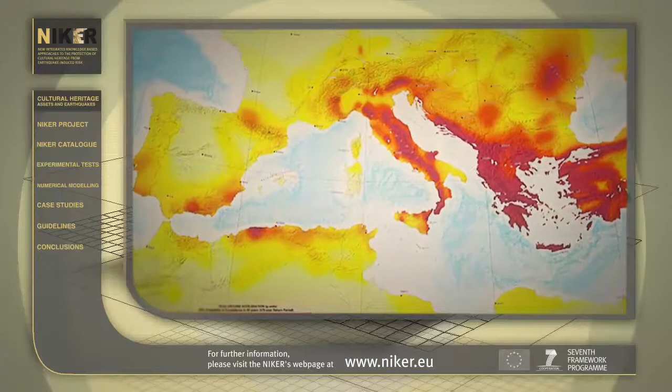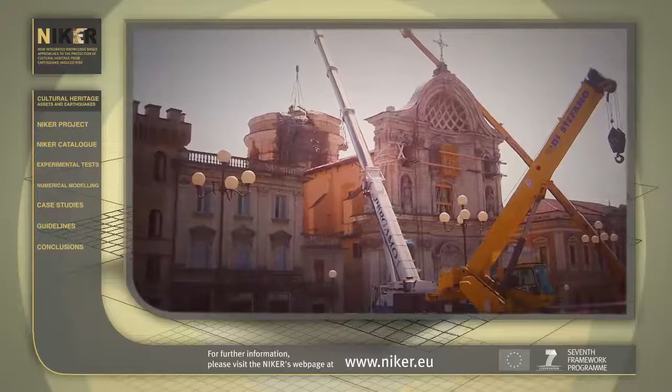For example, about 20% of Europeans live in areas with a moderate to high seismic hazard. In addition to high loss of human lives, earthquakes are also responsible for significant loss in cultural heritage assets, the most vulnerable and valuable constructions. Recent earthquakes have demonstrated a strict correlation among safety of citizens, loss of cultural heritage value, and increased danger caused by incorrect interventions on buildings.

Earthquakes are unpredictable and inevitable, but the loss caused can be minimized. Together with a suitable characterization of the seismic hazard, the main tool to mitigate casualties and protect cultural heritage assets is the development of materials and technologies aimed at reducing the structural vulnerability of the constructions to earthquakes.

Potential damages on cultural heritage assets are currently too high, mostly due to their intrinsic vulnerability and to the fact that most of the materials and technologies applied to date are too intrusive, cost inefficient, and often unreliable or non-effective.

NIKER is a research project funded by the European Commission, aimed at the protection of cultural heritage from earthquake-induced risk. The NIKER project encompasses the active participation of 18 partners, representatives of universities, research centers, public organizations, and private companies from 12 countries of Europe and the Mediterranean basin.

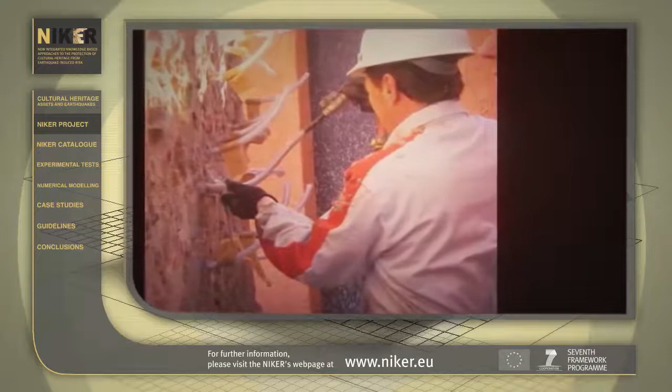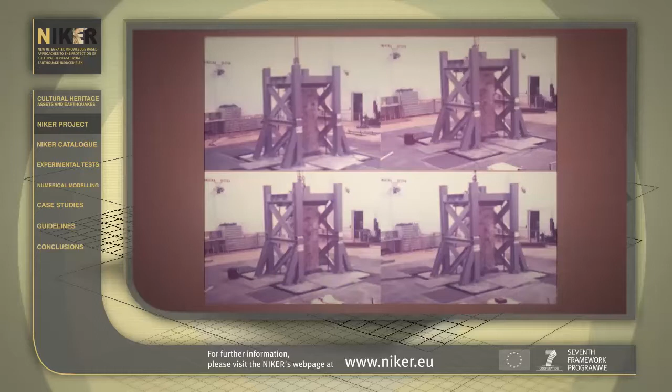The project tackles the problem of earthquake impact on cultural heritage assets, starting from consideration that efficient protection can only be achieved on the basis of the minimum intervention approach. This requires that the potentials of existing materials and components are exploited as much as possible, and that candidate interventions are validated and optimized under real-life conditions.

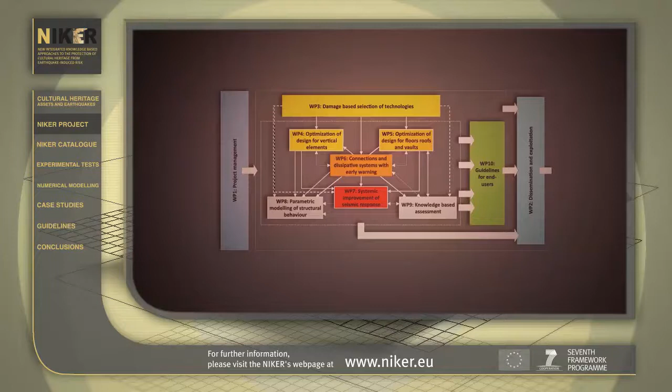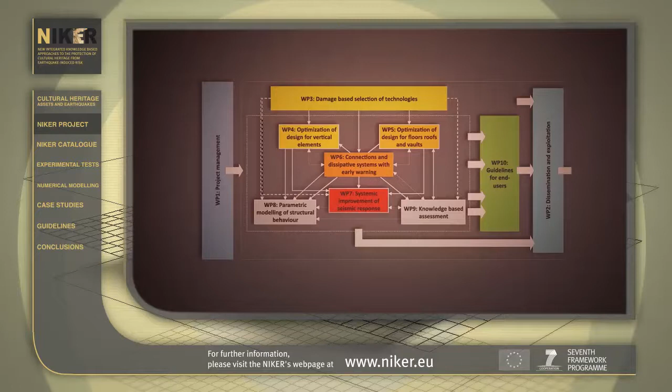The project is organized into 10 interactive work packages. Its main objective is the development and validation of innovative materials and technologies for systemic improvement of seismic behavior of cultural heritage assets. To reach this goal, the project is structured into 3 main steps.

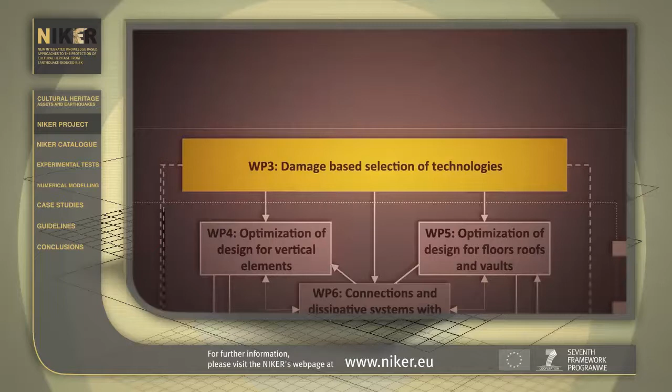Creation of a database with new relational structure with the task of orienting and assisting the development of materials and techniques for intervention. Experimental testing, numerical simulation, parametric modeling, and derivation of design methods for vertical and horizontal structural elements and connections, and for the overall seismic behavior of buildings.

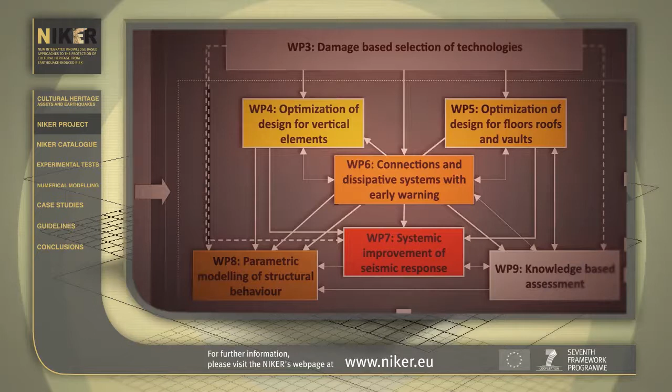Development of knowledge-based assessment procedures, validation of the entire methodology on real case studies, and development of guidelines for end users.

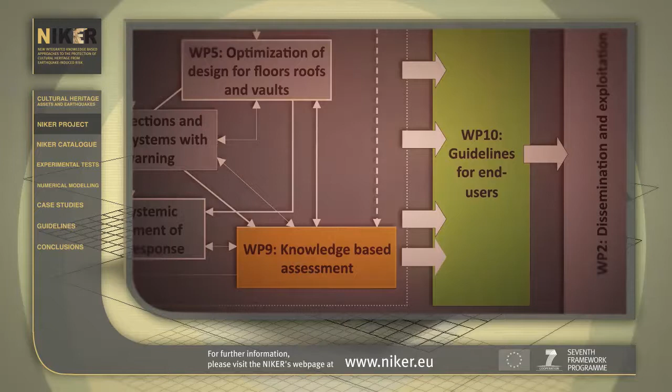The first step of the project deals with the studying of available classifications and databases on earthquake-induced failure mechanisms, construction types and materials, interventions and assessment techniques, in order to cross-correlate the information already available in literature.

Cultural heritage construction typologies and the related structural elements are listed and associated with the most significant failure mechanisms for each structural element. The main outcome of the catalogue is a matrix that connects the available intervention techniques with the elements on which they are applicable and the related failure mechanisms that can be hindered or reduced.

This relational structure also provides the performance indicators of the strengthening techniques when these are available in literature or from the tests carried out within the project.

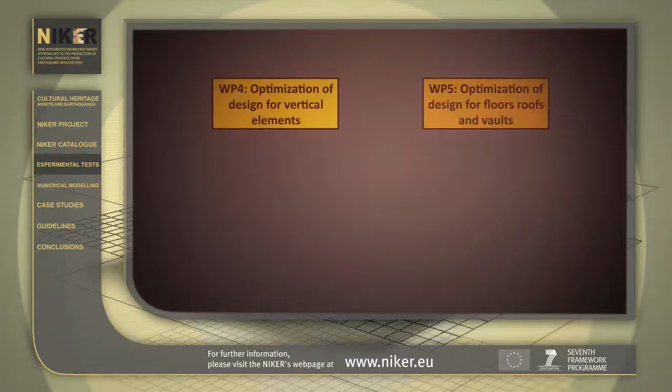The overall seismic response of historic buildings is determined by the behavior of the single structural vertical and horizontal elements, as well as by their mutual connections. The experimental activities within the NIKER project include testing of vertical elements, testing of horizontal diaphragms, testing of structural connections, and shaking table testing of substructures and building models.

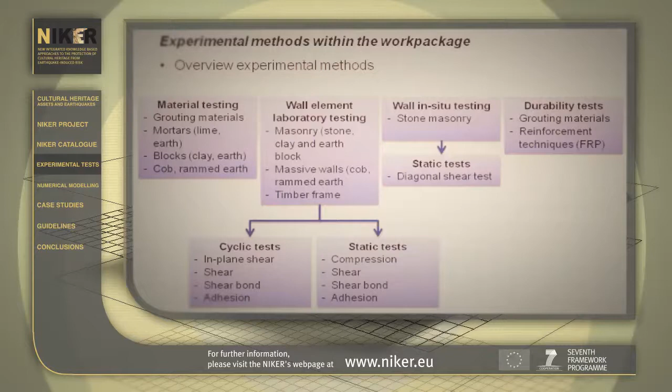The experimental tests on vertical elements were carried out on stone, brick, earthen and timber-framed masonry walls. Tests were also carried out on real walls on site.

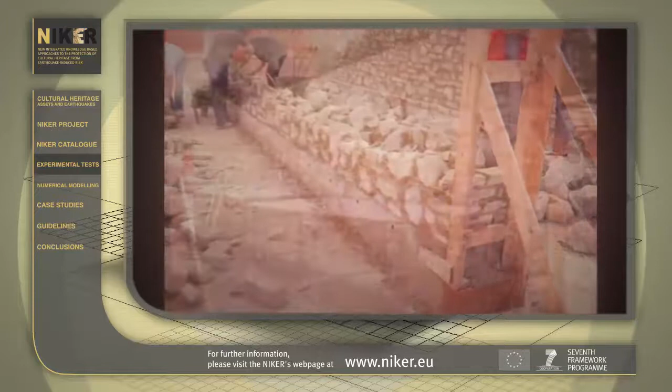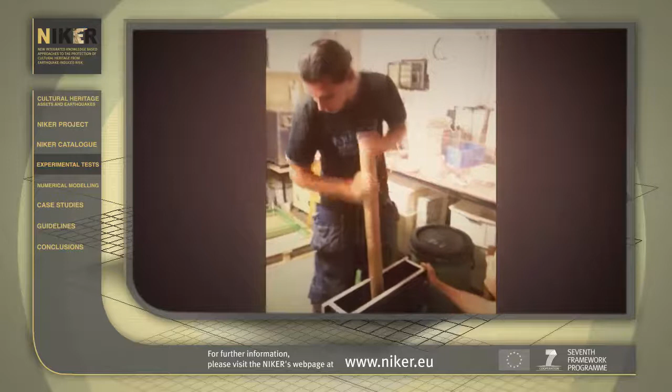The construction techniques for stone masonry consisted essentially in regular and irregular three-leaf limestone masonry. Adobe walls were constructed as one-leaf masonry with earthen mortar. Rammed earth specimens were prepared by hand with formwork. Cob specimens consisted of a mixture of raw earth and straw. The timber-framed panels consisted of timber and clay brick masonry.

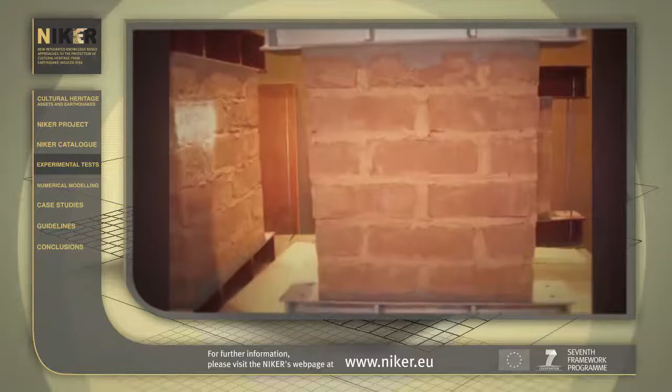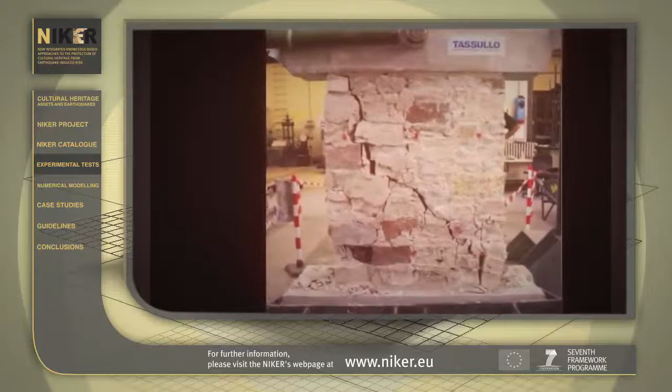Different types of strengthening were considered, ranging from traditional to innovative techniques and materials. The static and cyclic tests carried out encompassed uniaxial compression tests, diagonal compression tests, and shear compression tests, in order to get a comprehensive characterization of basic mechanical properties and of seismic performance of the masonry walls with and without retrofitting.

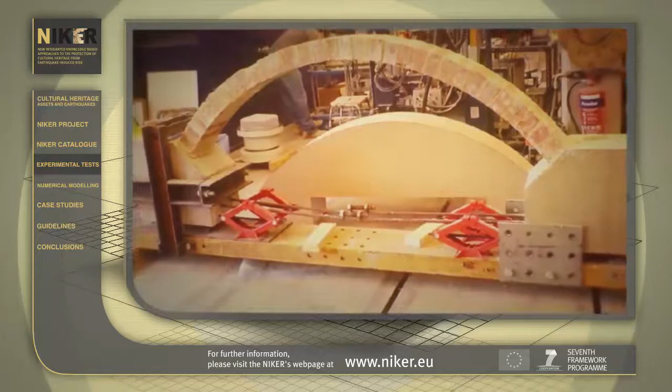The experimental tests on horizontal diaphragms were mainly aimed at characterizing the in-plane stiffness of wooden floors, the formation of a four-hinge collapse mechanism in brick masonry vaults, and the cyclic behavior of roof wooden frames.

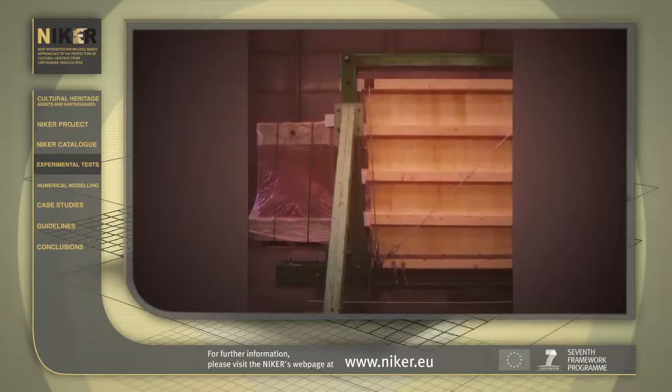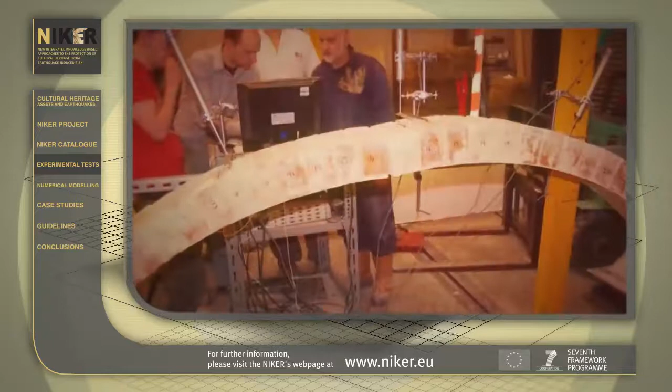The in-plane monotonic and cyclic tests on wooden floors were carried out on both reconstructed wooden floor specimens and on-site bare wood or trodden earth floor specimens. Various strengthening techniques were applied. The brick masonry arches were tested under monotonic and fatigue loading, with intrados and extrados SRP strengthening.

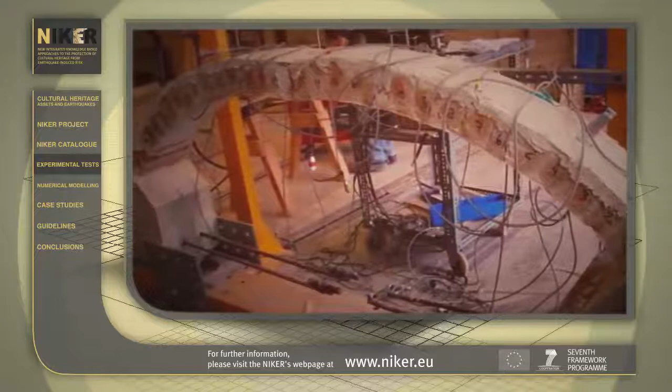Cyclic tests were carried out on brick masonry vaults before and after strengthening by various types of fiber-based composite materials. A series of tests were carried out on wooden trusses rescued from existing buildings, also in relation with the deterioration of the connections, and the physical and mechanical characterization of wooden materials in timber elements.

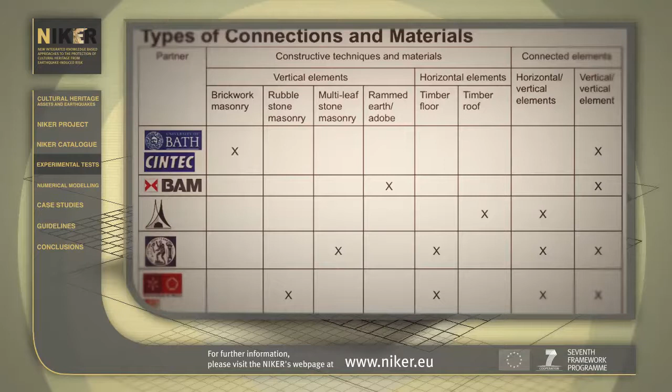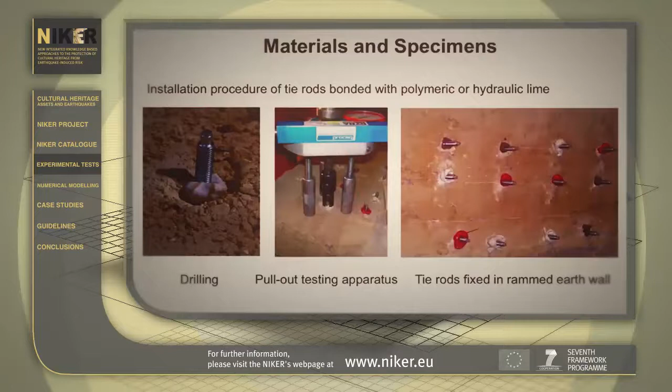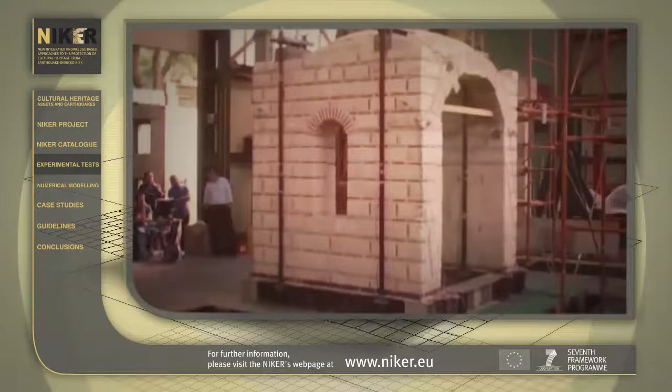The tests on structural connections included single structural elements, whole connections, and entire structures. The types of tested connections covered connections between masonry walls, connections between traditional masonry walls and timber floors, wall-to-wall and wall-floor roof connections in different earthen materials, dovetail halved joints of roof frames, and connection between the leaves of multi-leaf stone masonry walls.

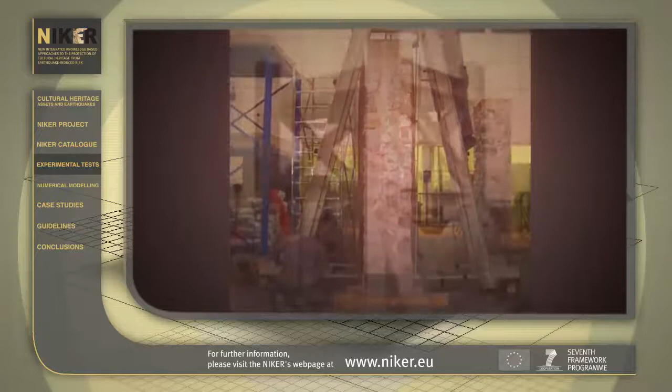The shaking table test program included tests on substructures at real scale and tests on building models at reduced scale. The experimental work on substructures covered the cases of shaking table testing of walls under out-of-plane excitation, and shaking table testing of a brick cross vault supported by two three-leaf stone masonry walls.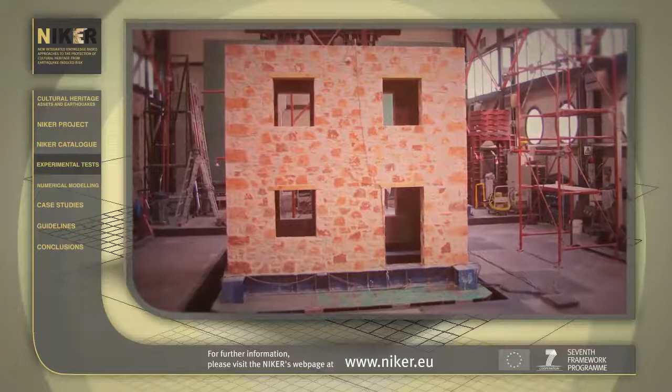The tests on model buildings included 4 specimens made of three-leaf stone masonry with timber floors in as-built condition, after grout injections of the walls, and with enhancement of the diaphragm action.

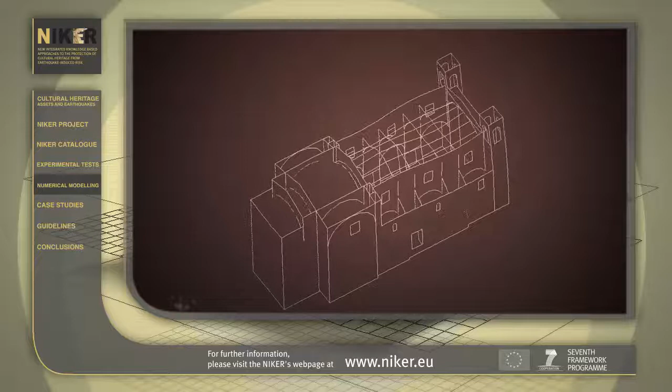The structural analysis of a historical construction contributes to a better understanding of its current condition, helps to elaborate a reliable diagnosis, and makes it possible to numerically test and optimize the design of intervention measures. However, the modeling strategies to be adopted depend on the complexity of the structure, level of accuracy required, availability of input data, and use of the results.

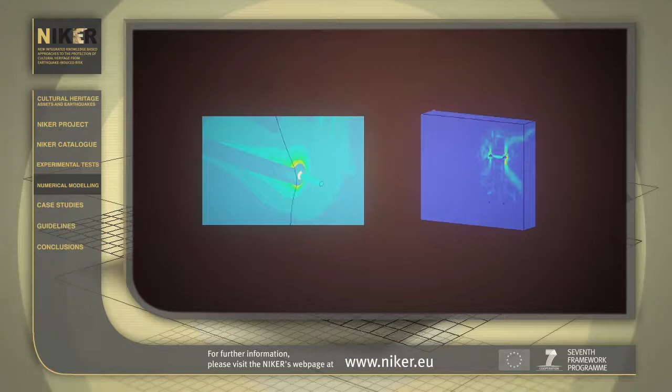The numerical modeling inside NIKER was carried out at 2 main levels. Complex numerical strategies were adopted to simulate the experimental tests and to give adequate insight to the test results. These detailed models were used to carry out parametric analysis necessary to define critical mechanical parameters, to assess the performance of the proposed intervention techniques, and to assist the tasks of optimizing design.

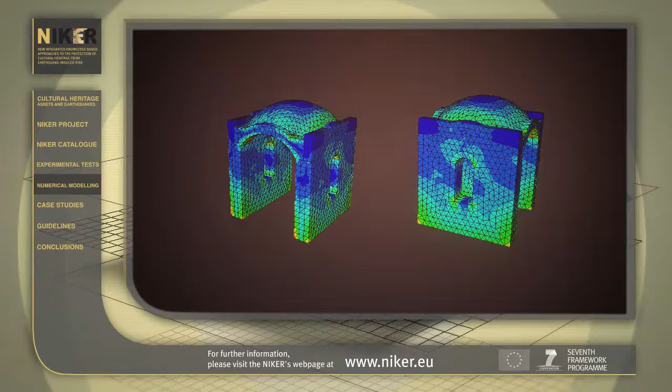These models were also used to derive simplified relationships to be applied in the analysis of entire buildings. Hence, parametric study of buildings when varying their main features and strengthening options was carried out. In this way, the building performance and response parameters to be used in seismic assessment and performance-based design were identified.

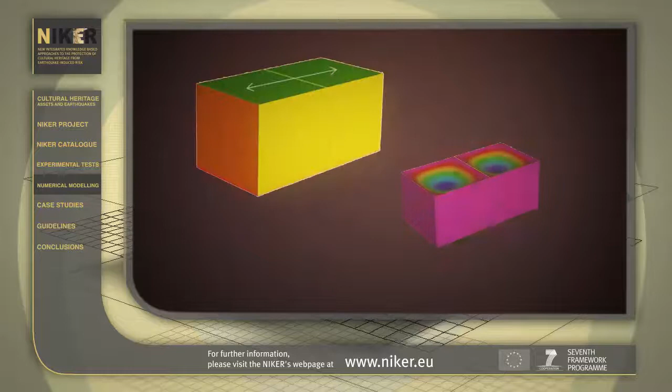The seismic assessment procedure proposed within NIKER involves a series of activities, such as inspection, monitoring, structural analysis, intervention, and quality verification systems. The application of knowledge-based assessment procedures to case studies is intended to validate the entire integrated methodology in real site conditions.

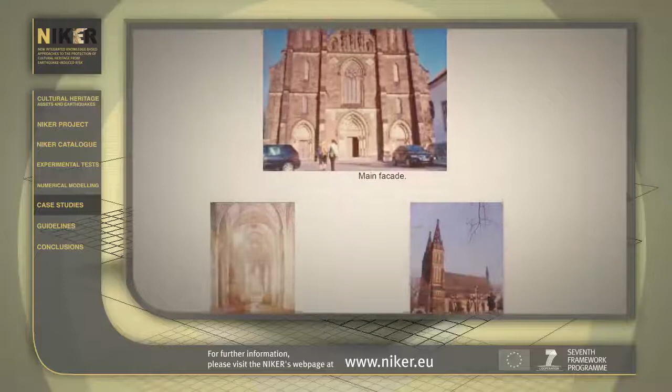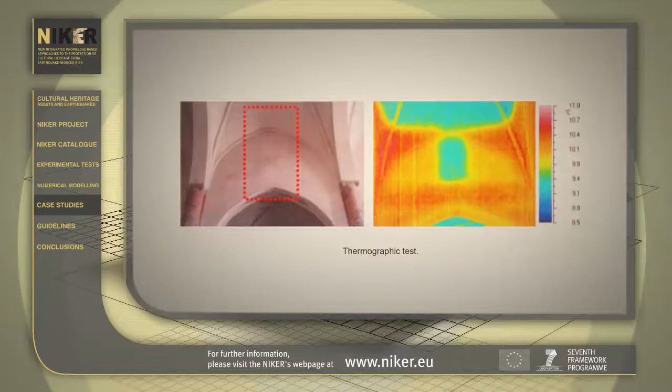This involves calibration of monitoring systems and devices, application of the monitoring systems and devices for the identification of the real behavior of buildings, application of the knowledge obtained through monitoring to the creation and updating of reliable structural models, and definition, evaluation, and implementation of optimal intervention techniques.

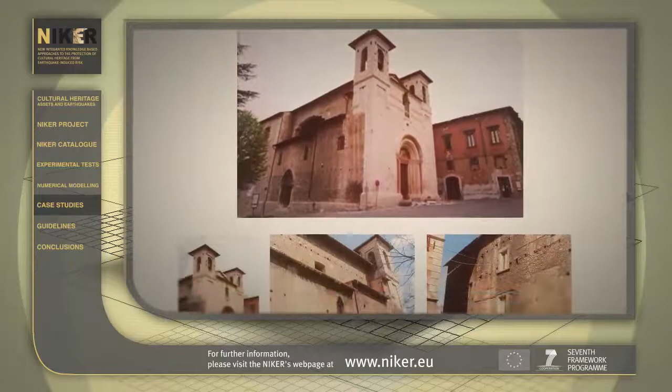Implementation of instrumented dissipative devices, and assessment of the effectiveness of interventions through optimal quality assessment procedures.

The selection of 20 case studies was intended to cover a wide and representative range of conditions regarding geographical location, local seismic hazard, construction materials, structural typologies and uses, preservation condition, and risks involved.

Among the buildings considered are a set of churches, a large fortress, a large Roman construction, masonry towers and minarets, large Gothic cathedrals and monasteries, masonry buildings, a former Byzantine church, and a large earthen construction.

All these cases have been analyzed and evaluated regarding their potential contribution to the validation of the monitoring systems and model updating strategies resulting from the project.

Some of them are also considered for the implementation and validation of intervention techniques, along with the application of the quality assessment procedures. The guidelines for end users with practical information for the protection of cultural heritage assets from earthquake-induced risks are a major result of the NIKER project.

The guidelines developed characterize the design and execution of innovative intervention technologies on vertical and horizontal elements. The various techniques described in the documents present details on materials, design rules, and relation with possible failure mechanisms and damages. The guidelines also suggest optimum intervention for improvement of seismic performance of vertical and horizontal elements.

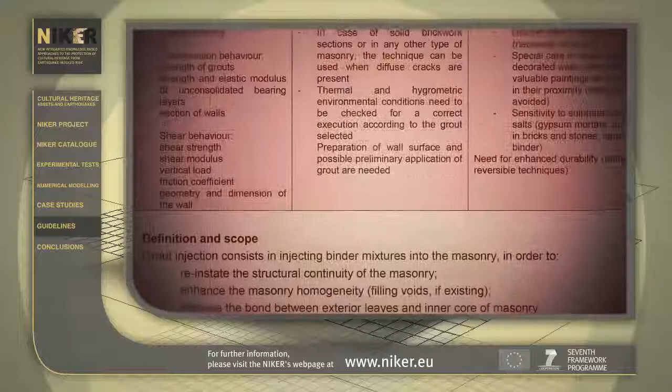Furthermore, a set of dissipative devices have been developed and validated. The guidelines provide recommendations for a correct choice, optimum design, and installation of dissipative systems.

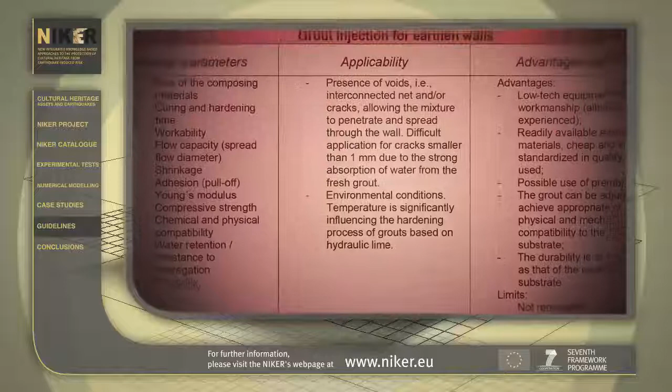The multidisciplinary nature of interventions on cultural heritage presents a high complexity for professionals to achieve the necessary knowledge to support the making of decisions. In this sense, the procedure required to support and control an adequate decision-making process aimed at the selection of correct interventions is also addressed in the guidelines.

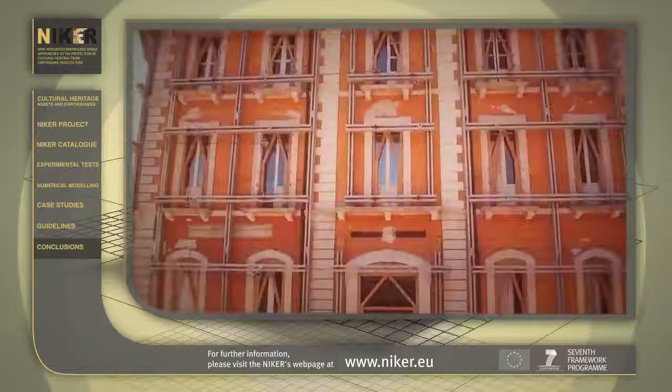The preservation and valorization of architectural heritage is more and more a major social and economic concern in modern societies. The research work carried out within the NIKER project represents a valuable contribution to characterize and improve the seismic performance of cultural heritage assets, and thus to protect them from earthquake-induced risks.

As cultural heritage buildings are part of our identity, we are responsible for keeping them in good condition for the generations to come.